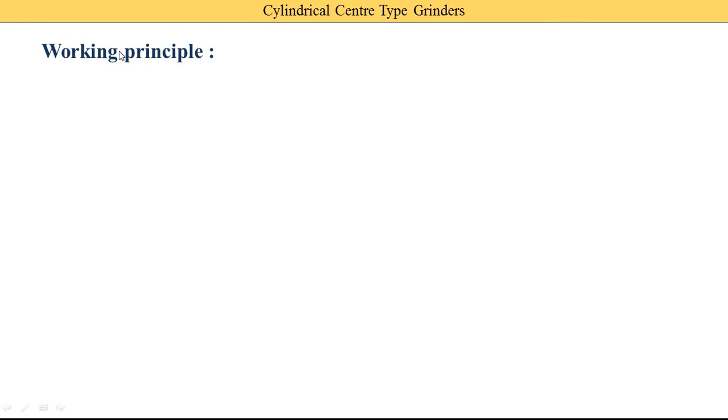In this video, I explain the cylindrical center type grinding machines or grinders. In this video, I explain the constructions and the working principles of the cylindrical center type grinders. So first we understand basic working principles of the cylindrical center type grinders, then we move towards the constructions. So what is the working principle?

To perform the grinding operations, there must be a relative motion between the workpiece and the grinding wheel. So we require the relative motion. Relative motion means both are moving or both are rotating. That's called the relative motion, means with respect to each other both have a certain velocity. For cylindrical grinding, the following four movements are involved.

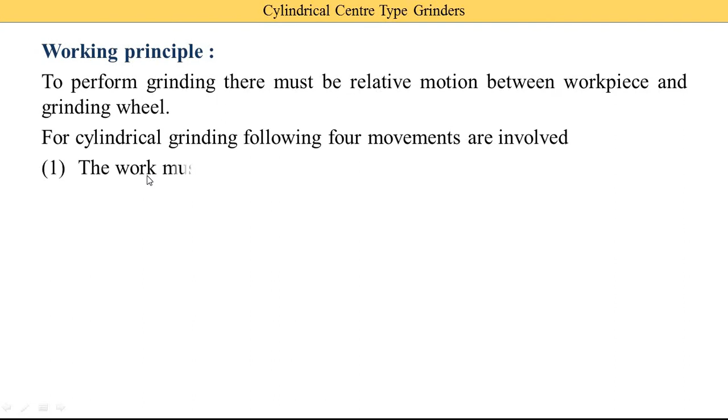First, the work must revolve, means the workpiece is revolving. Second one, the wheel must revolve, means the grinding wheel is also a rotating part and the workpiece is also a rotating part. Third, the work must pass the wheel, means the workpiece has a certain longitudinal motion, because in some cases the width of the grinding wheel is smaller than the length of the workpiece. These points 3 and 4 I explain during the understanding of the constructions. Point 4 is the wheel must pass the work.

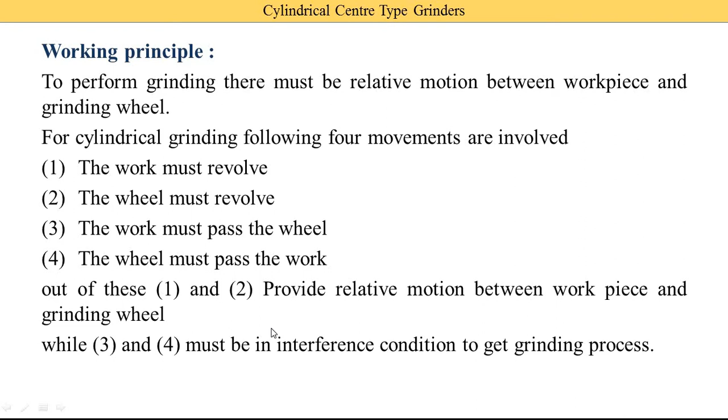Now out of these 4, 1 and 2 provide relative motion between the workpiece and the grinding wheel, and 3 and 4 are interference conditions to get the grinding process. 1 and 2 are required in every machine, and 3 and 4 are interference conditions, means they depend on the size of the workpiece and the size of the grinding wheel. Now next we move towards the constructions.

Now we understand the constructions. Construction means the various components used in these cylindrical center type grinders. Plain cylindrical grinding machines are powerful machines for work done between the centers, means the workpiece revolves between the two centers, continuously moving between them. One center is of the headstock and the second center is of the tailstock.

On the support of the headstock and the tailstock, the workpiece is fitted and the grinding process is carried out, and it is called center because the workpiece is continuously rotated on the same centers. That's why it's called the center type grinder. They are used for grinding external cylindrical surfaces, not for internal purposes, not for a flat surface or a curved surface. It is just used for the cylindrical surface.

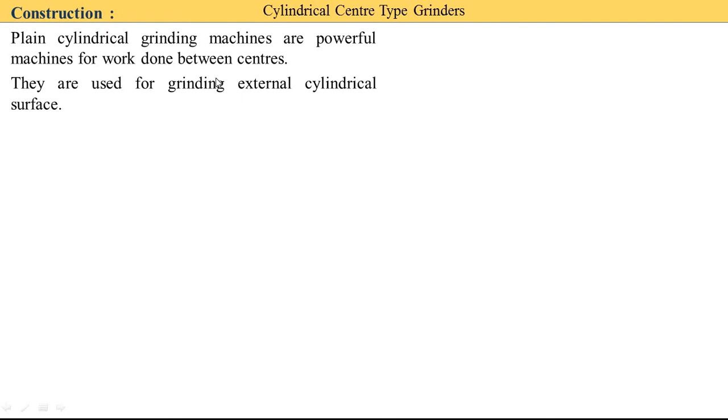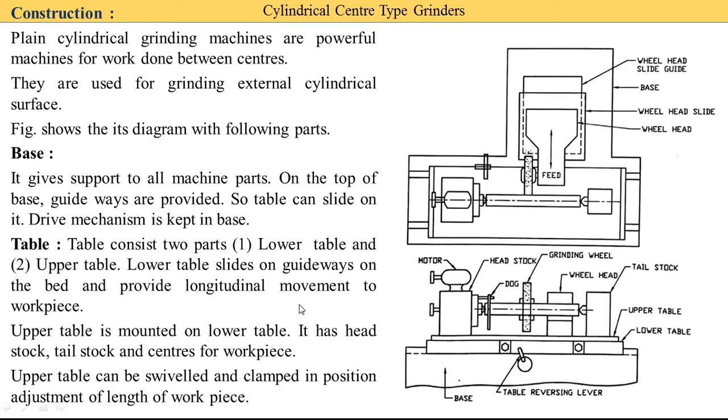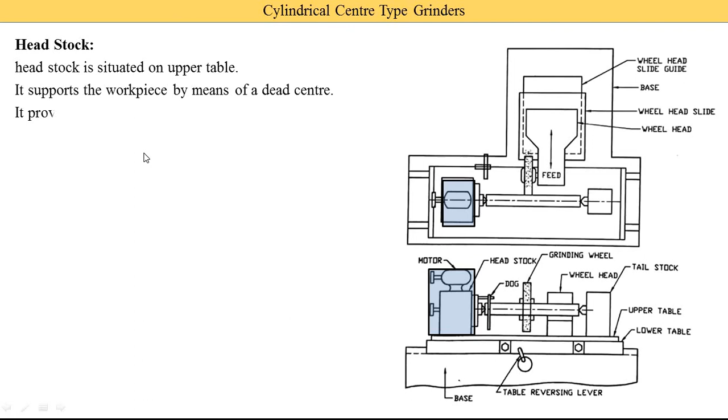Now, what are the functions of the headstock? The headstock is situated on the upper table. Here you see in the upper table the headstock is mounted. It supports the workpiece by means of a dead center. It provides the rotational motion to the workpiece by means of the dog. So here you see this is a dog.

So we are able to use different devices. Either we use the chuck or spindles; different options are available that you already know. For the rotating motion of the headstock we require an electric motor, so here one motor is provided. The headstock generally gives the rotational motion to the workpiece. Alternatively, it may hold and drive the workpiece by using the chuck.

The left-hand end is installed or fitted into this chuck or spindle, and the right-hand end is supported by the tailstock, depending on the different length of the workpiece. So the tailstock also slides on the upper table according to the length of the workpiece.

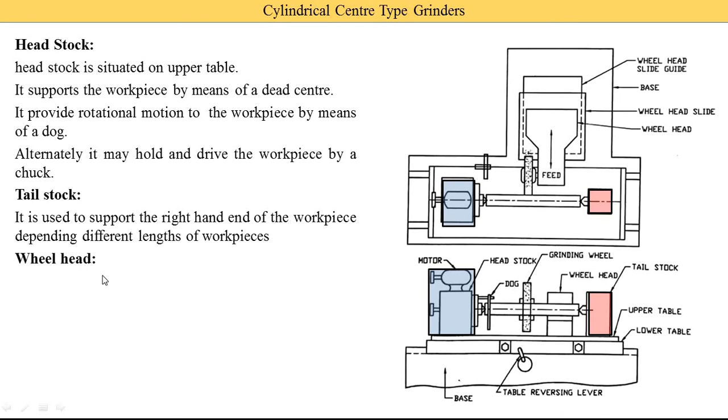Another is the wheel head. Here by the yellow block you see the wheel head. It is the head for the wheel. Here you see this is the grinding wheel. The grinding wheel is rotating, and the workpiece is also rotating. For rotating the grinding wheel, one electric motor is required. This electric motor is fitted on the wheel head.

It is the base part for the wheel head. It is installed at the backside or rear side of the grinding machine. It is mounted on a slide at the top and rear of the base. It carries a driving motor and the grinding wheel. This driving motor is used to rotate the grinding wheel.

The wheel head may be moved perpendicular, across to the table ways, meaning at right angles to the table, so this wheel moves in this direction. In the third point of the working principle we understood that the grinding wheel is moved towards the workpiece, and in the fourth point the workpiece is moved towards the grinding wheel.

Here also you see this arrow indicating it. The grinding wheel is able to move towards or away from the workpiece depending on the diameter of the workpiece, and it is operated by hand or power to feed the wheel to the work. This feed, towards or away from the workpiece, is given manually or by power.

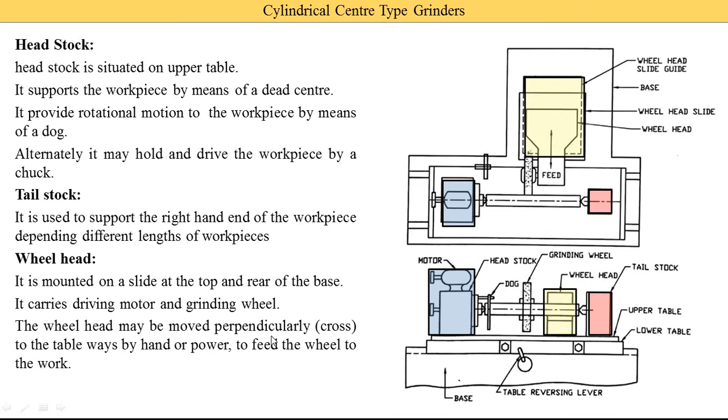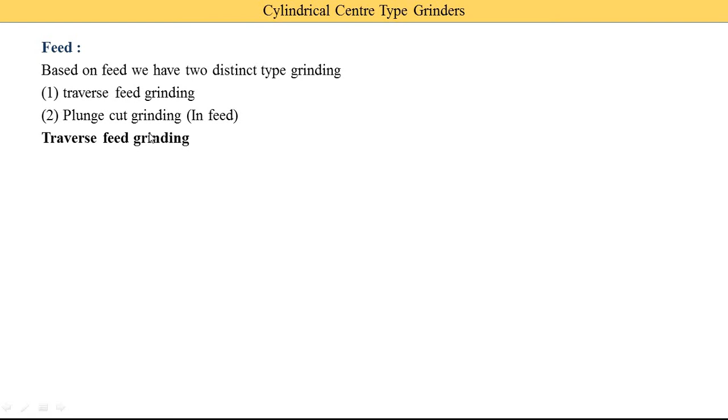Next part is the feed. Which type of feed is generally provided? Based on the feed, we have two distinct types of grinding. The first one is traverse feed grinding, and the second one is plunge cut grinding. First we understand traverse feed grinding.

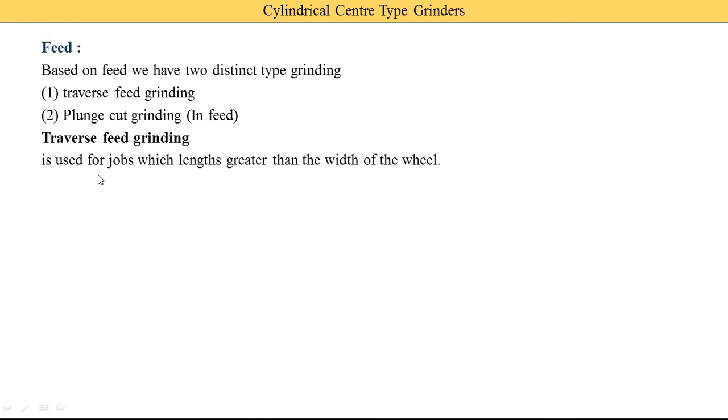Traverse means it moves from one end to another end. It is generally used for a job whose length is greater than the width of the wheel. At that time we need to move the wheel from one end to the other, or slide the workpiece from one end to the other, to complete machining of the full length of the workpiece. It is called traverse feed grinding.

The job held between the centers traverses past the rotating grinding wheel for grinding. At the end of the traverse, the direction is reversed, and simultaneously the feed is given by the motion of the grinding wheel head slide.

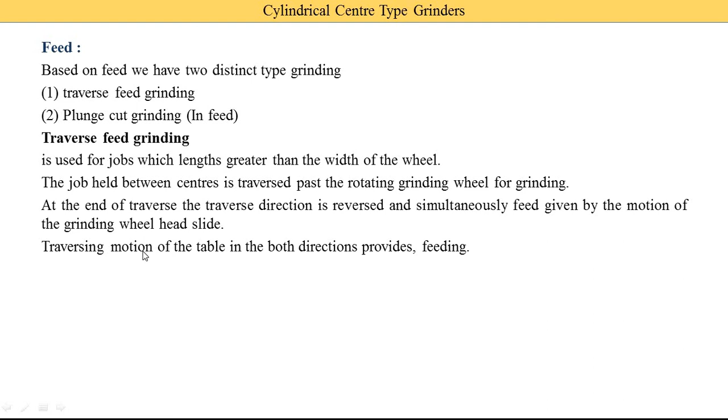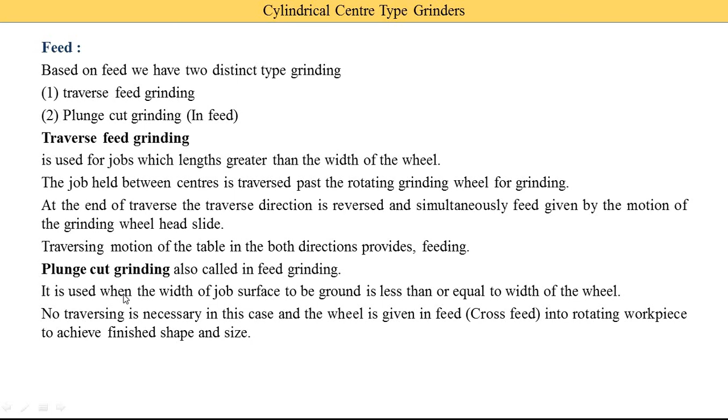The second one is plunge cut grinding, also called in feed grinding. It is used when the width of the job surface to be ground is less than or equal to the width of the wheel. At that time we do not require the traverse motion of the grinding wheel or the workpiece, and the wheel is fed into the rotating workpiece to achieve the finished shape and size.